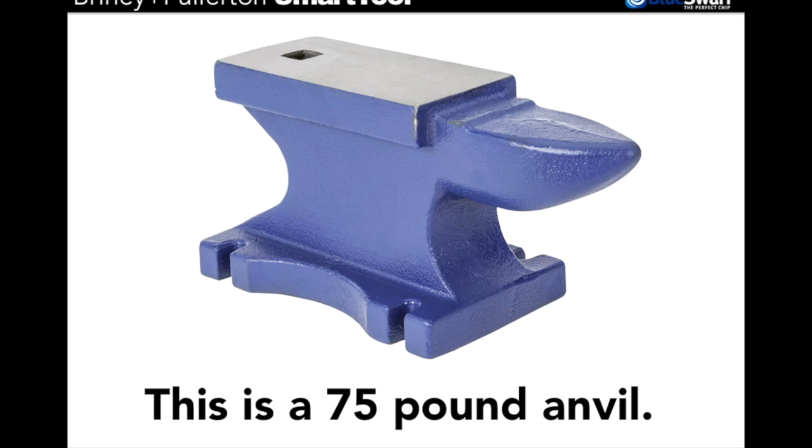This presentation is called The Physics of Milling. This is a 75-pound anvil. We attached an accelerometer to the anvil and lightly tapped it with an instrument hammer. The result is the anvil deflected, it rebounded, and then it vibrated back to rest. The takeaway from this is if a 75-pound anvil will deflect and vibrate, so will your milling tool.

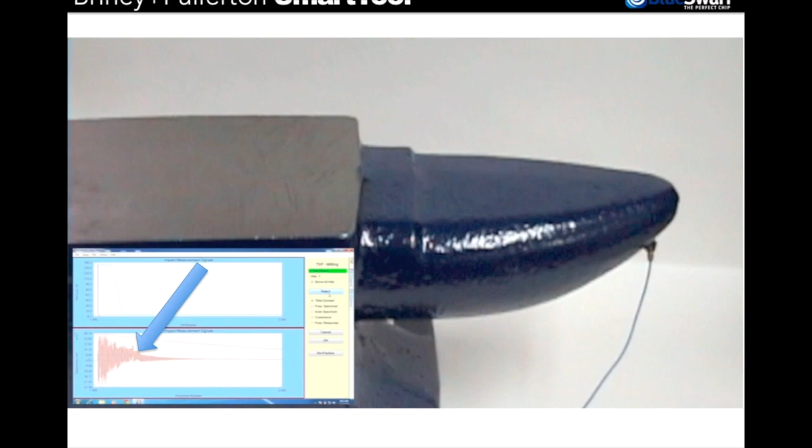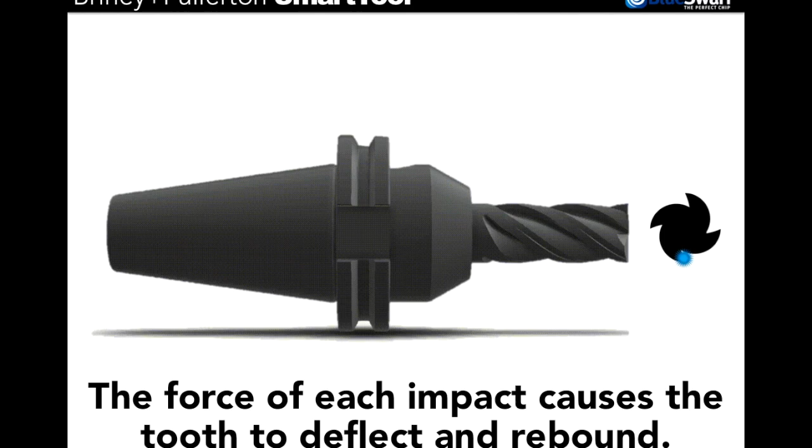The milling tool has rotating teeth. Those teeth make an impact on the workpiece with every revolution. And every impact causes the end mill, the tool assembly, to deflect and also rebound. And this is what it looks like.

The timing of the tooth impacts is very important. If we arrive too early in that back and forth cycle, we're undercutting the programmed cutting depth. We're leaving a lot of material for the next tooth to have to deal with, and we're throwing off the timing. If we arrive too late, we're overcutting the program depth. That tooth is going to fail sooner than the rest because we're exceeding its chip load limit, and we may be scrapping the part by overcutting the program.

Finally, if each tooth is cutting equally, arriving at the same timing and depth, the surface finish is going to be good, the part accuracy is going to be good, and the tool life is maximized.

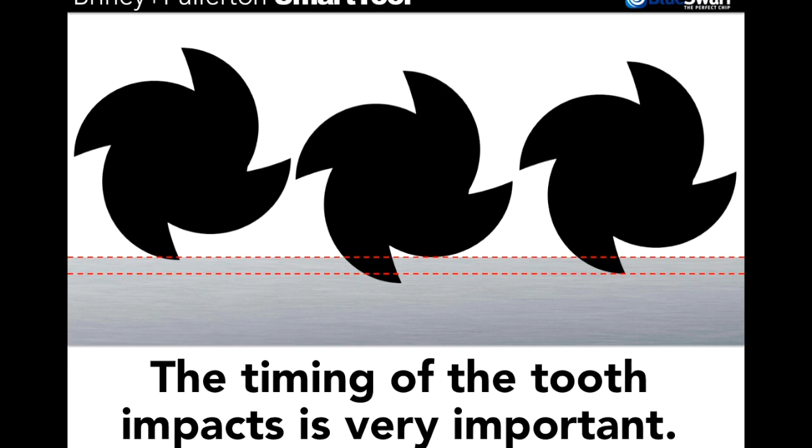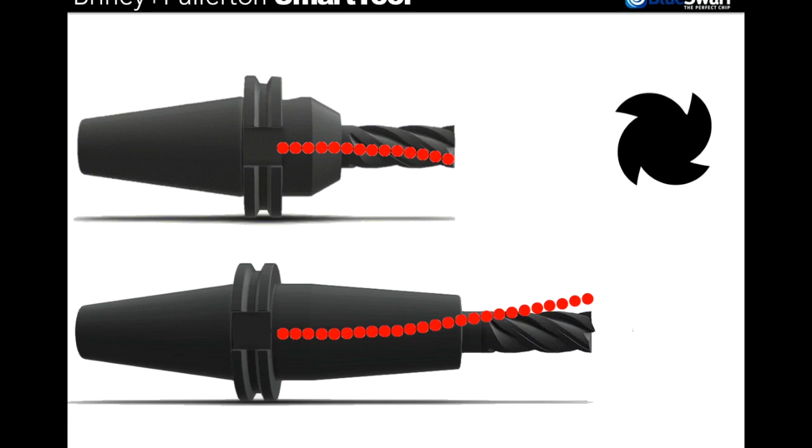This is how it works with the milling tool. So I've got an end mill and a short, stiff tool holder. The deflection is light, and we can set the timing to get the tooth impacts correctly timed. But we put the same end mill in a more flexible tool holder. Deflection is greater, and we have to slow the speed down in order to get the timing right.

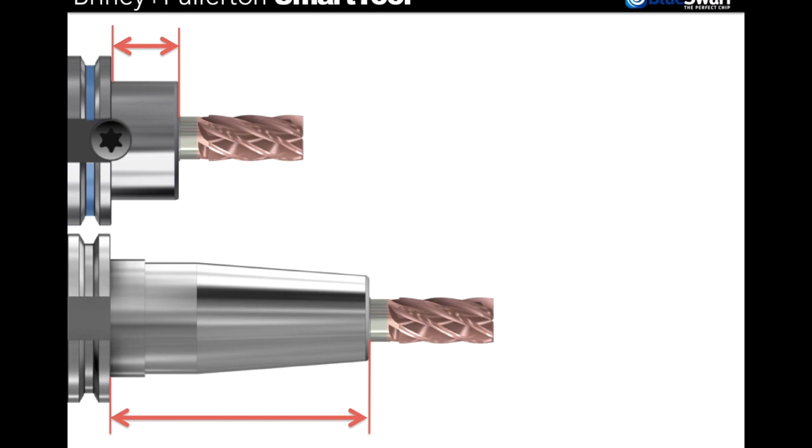So what makes the tool holder more flexible? Well, it could be length. Some tool holders have to be longer because they have to make room for a collet or some type of mechanism like a hydraulic cylinder or other type of mechanism. It could also be wall thickness. So if a tool holder is using contraction, shrinking, and expanding to hold the tool, the wall is going to have to be thinner to accommodate that, whether through heat or through pressure.

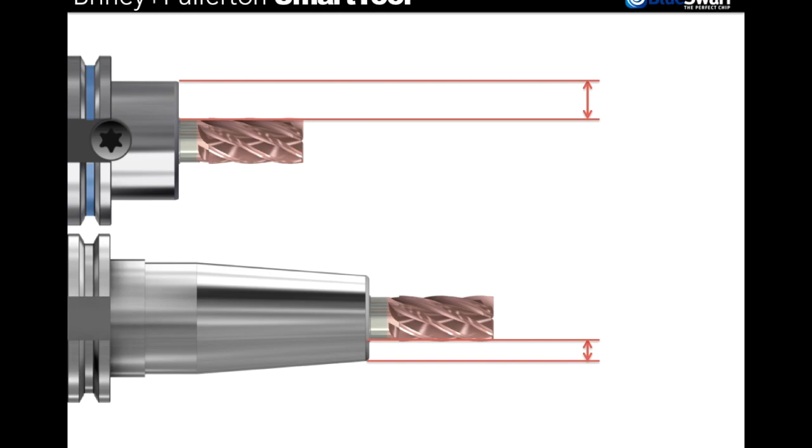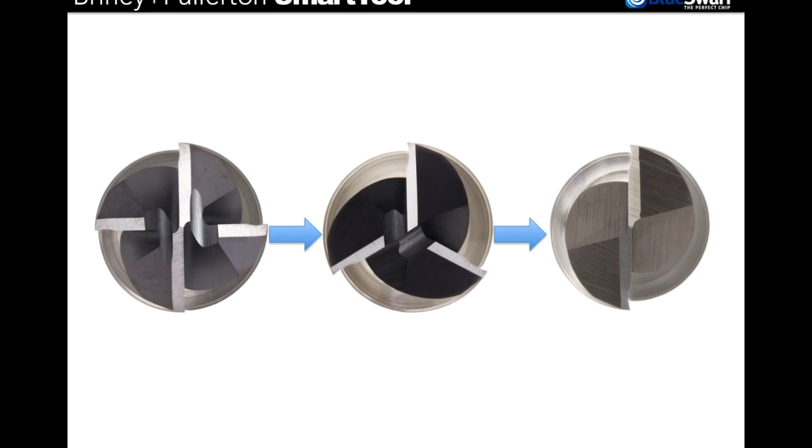So this is the response to a low frequency. We can either slow the speed down to get the timing of the teeth impacts right. We can lower the width of cut or lower the depth of cut, reducing the force on the tool and therefore reducing the amount of deflection. And finally, we can reduce the number of teeth to get the timing right. But each of these solutions reduces the metal removal rate. So low frequency equals lower productivity.

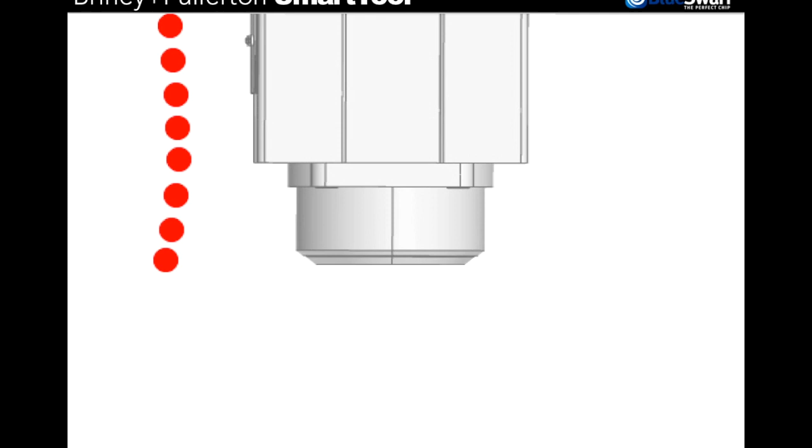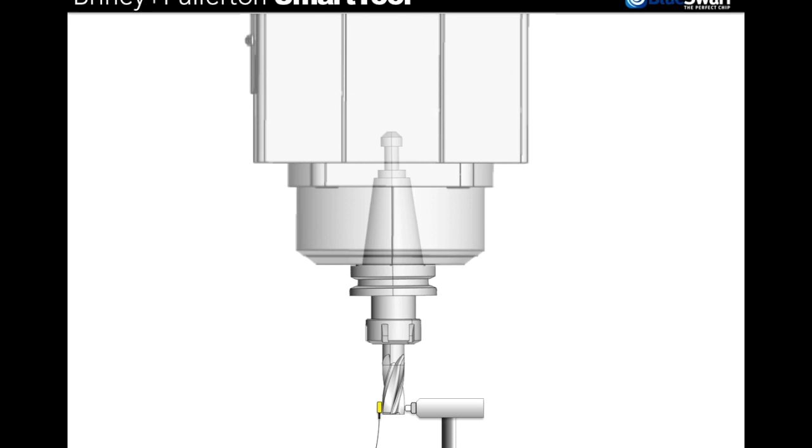Now here's the challenge. The spindle on the machine tool vibrates at one frequency. The tool holder vibrates at another frequency, and then finally we add the end mill, and that vibrates at a third frequency. So the only way to determine what the actual tool point frequency is is through a tap test. An accelerometer is placed on one side of the cutter. It's lightly tapped with an instrument hammer. We read the force that's applied and the tool's response to that force. So if you don't measure the tool point frequency, you can only guess at what the proper speed is going to be.

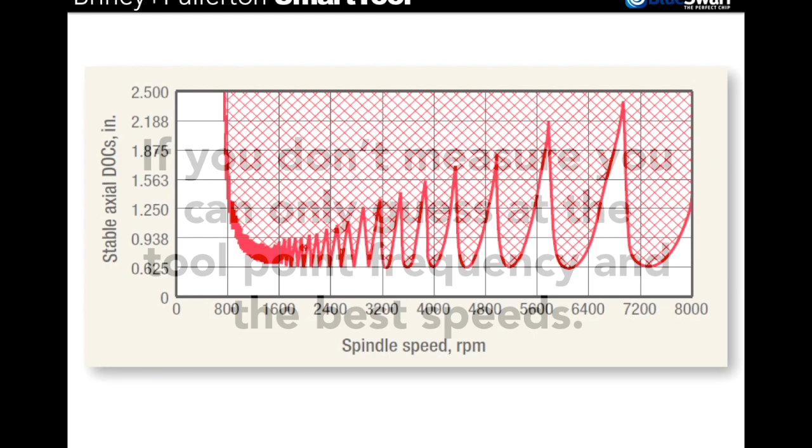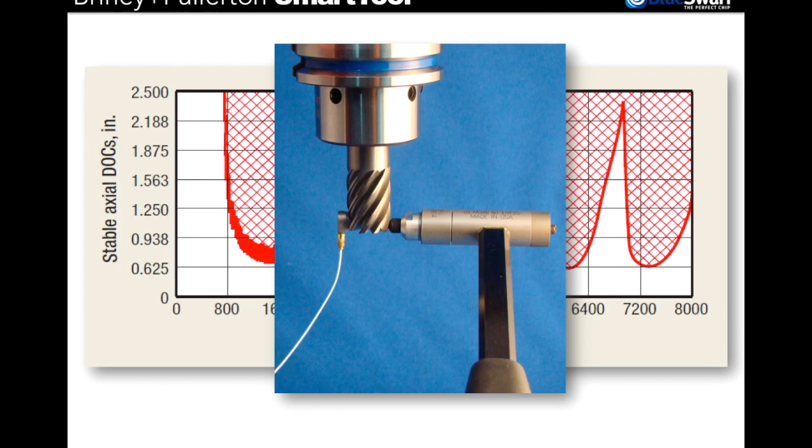So this is what we call the stability lobe diagram. It's only able to be produced through a tap test. Every different tool holder, machine, and material combination produces a different type of stability lobe diagram. A lot of companies use our stability lobe diagrams to promote their product, whether it's a machine tool or tooling.

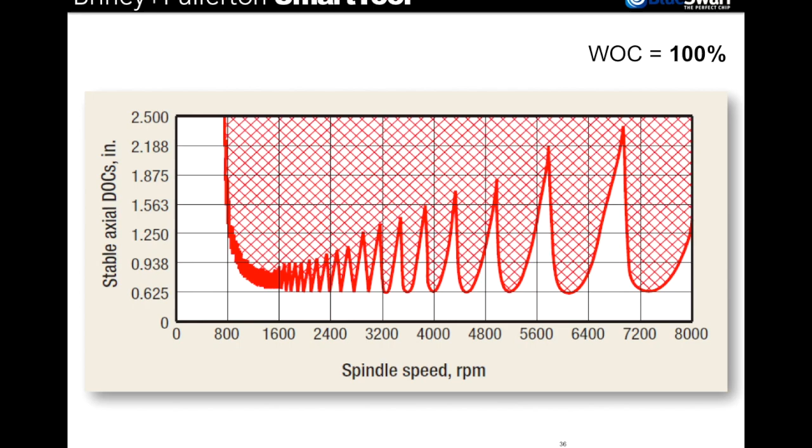The lower axis of the stability lobe diagram is spindle speed. The left axis is depth of cut. The white areas are stable combinations of speed and depth of cut. The red areas are unstable, where chatter is going to occur. On the far left, or the low speed, you see an area we call the process damped region. This means that the vibration of one tooth is dissipated before the next tooth comes through. So you can cut as deep as you want at these process damped speeds, but they're usually very slow.

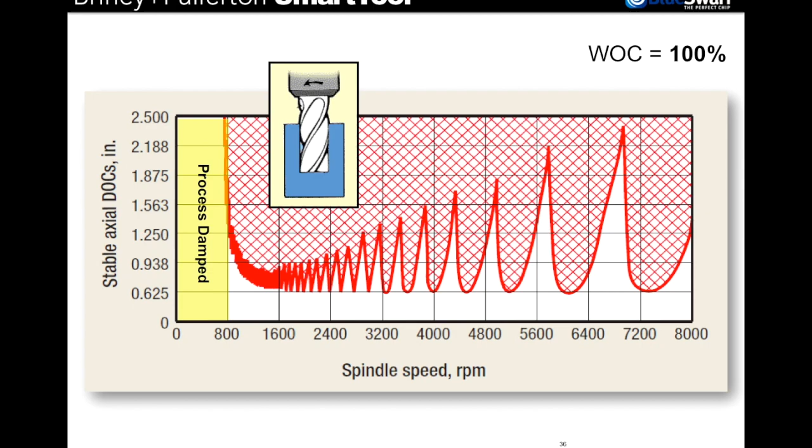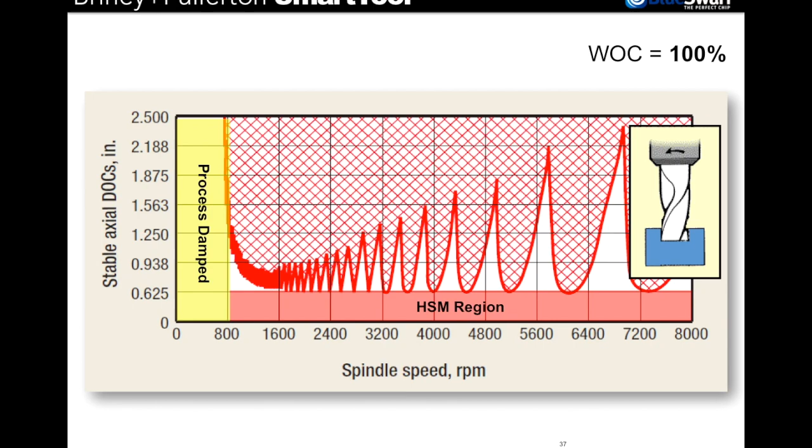At a low depth of cut, there's a region called the high-speed machining region. And the depth of cut is shallow enough that it doesn't deflect the tool enough to put it into one of these vibration patterns. And so you can cut as fast as you want. Now, if we were doing trochoidal milling, which is low width of cut or engagement, high depth of cut, we would just flip the depth of cut and width of cut around. So now the left axis is width of cut, and again we have the same trochoidal milling region instead of the high-speed machining region, which is low width of cut. I can run as fast as I want.

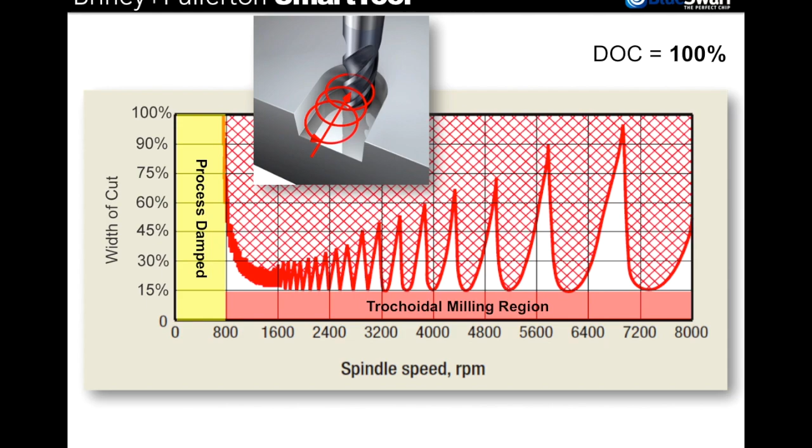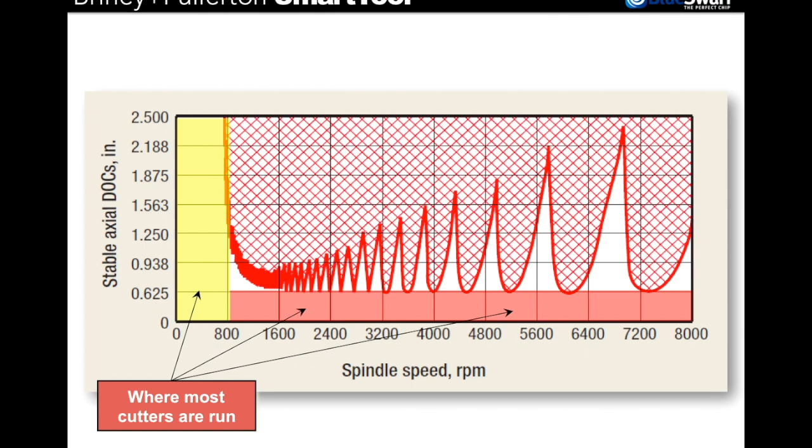And this is where most cutters run, in the process damped or the high-speed machining region. Because if you run into chatter, you end up lowering the speed or lowering the depth of cut until it goes away. But if you knew where the deepest, most robust speed was, where this lobe was located, you could have productivity or metal removal rate that's 10 times what you could get at the fastest high-speed machining speed or the deepest process damped depth of cut.

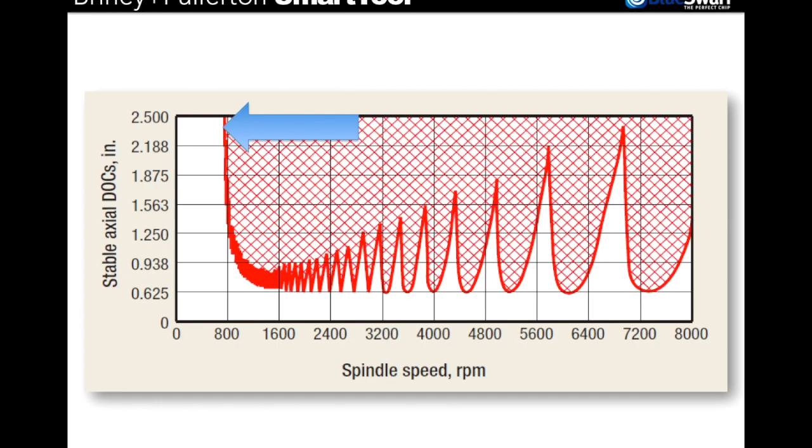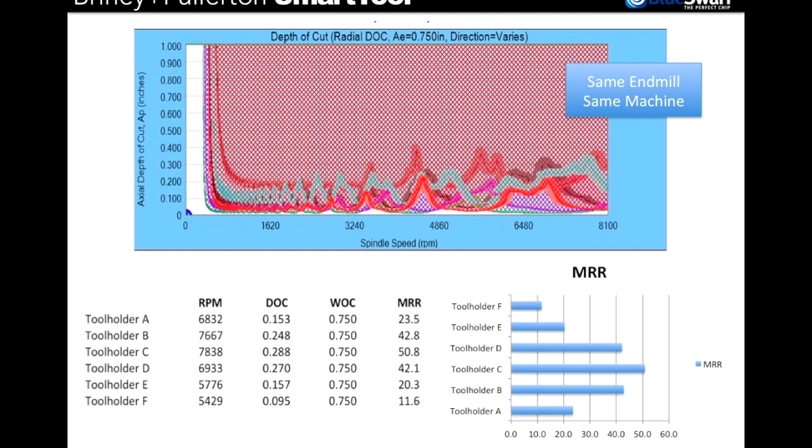So this is an example where we took the same cutter, same end mill, same machine tool, and tested it in 6 different premium tool holder systems. The difference between the best and the worst was 5 times. What that means is your end mill could either perform 5 times better or 5 times worse based solely on the tool holder you chose.

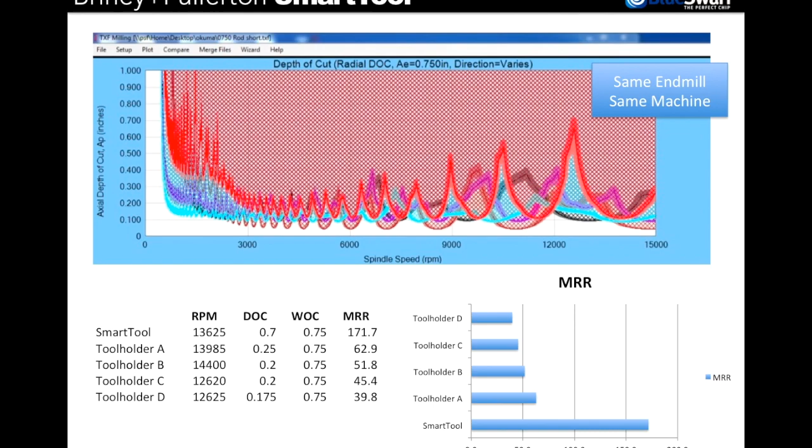Later, we tested the 4 best performing tool holders against the first version of the SmartTool, and you can see the dramatic difference. We were almost 3 times higher metal removal rate than those other tool holders. And that's where we began with the SmartTool. So with the SmartTool, we have a shorter projection, which results in a much higher frequency.

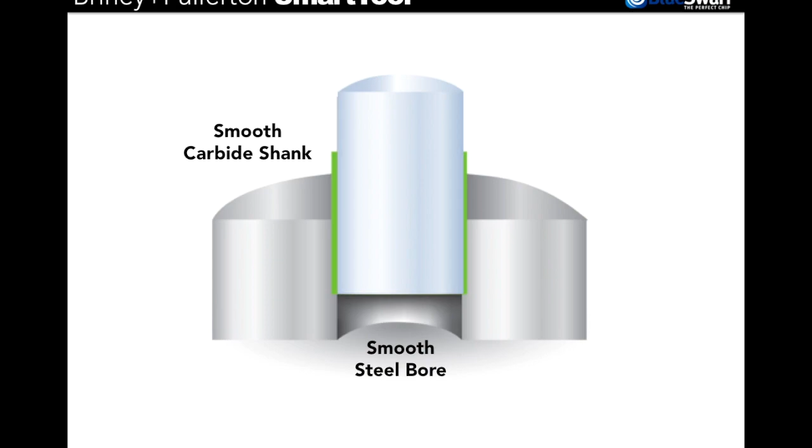Now here's where the problem begins with other tool holder systems. They almost all use just friction to grip the tool. So you have a smooth carbide shank being held in the smooth steel bore of the collet or the tool holder. But carbide is 7 times harder than steel. So there is no way that the tool holder itself is really going to be grabbing into the material of the end mill. It's not going to be deforming it or gripping it like you would see in a lathe chuck on a workpiece.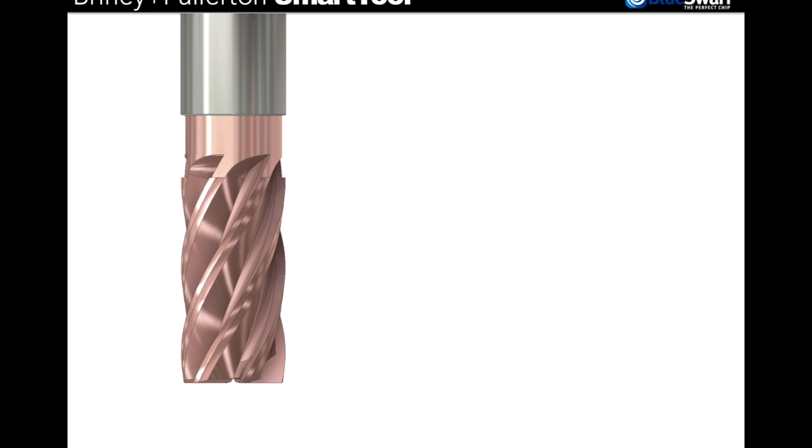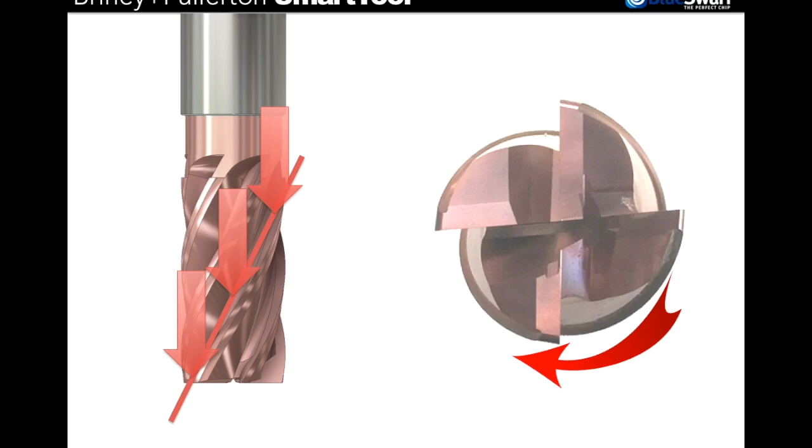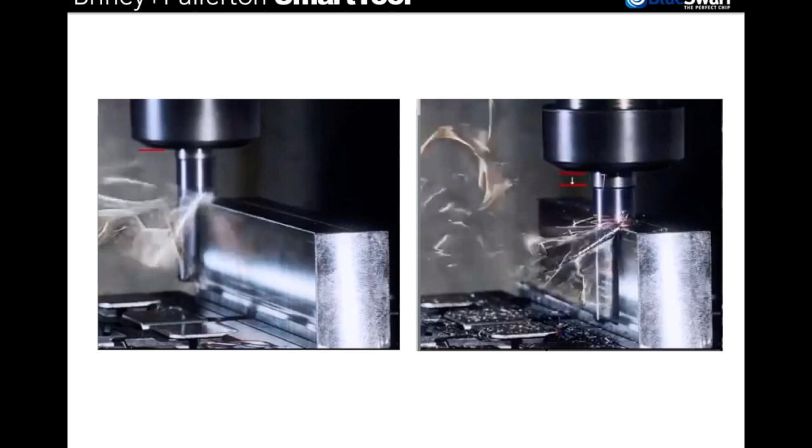With the spiral flutes of the milling cutter, you have tremendous downward force trying to pull the end mill out of the tool holder. In addition, you've got the forces pressing against each tooth, wanting it to twist inside the tool holder. The result of that is you often see tools pulling out or turning inside the tool holder. It doesn't take much to cause a problem.

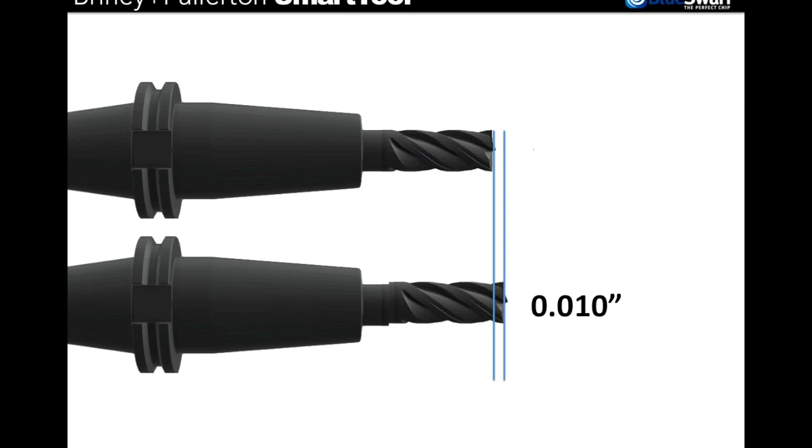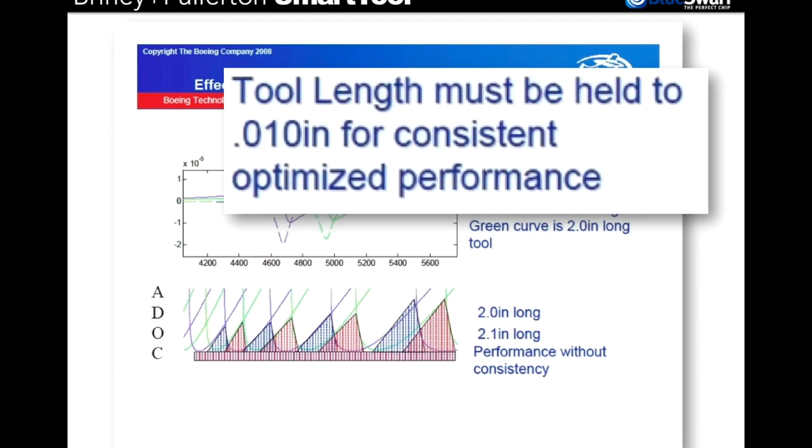In this case, a 10 thousandths difference in stick out, according to Boeing, will change the frequency of that tool. So you need to control the stick out within 10 thousandths. And here, a variation of just 7 degrees, a clocking of 7 degrees of the teeth of the end mill inside the tool holder, tripled the imbalance of the tool assembly.

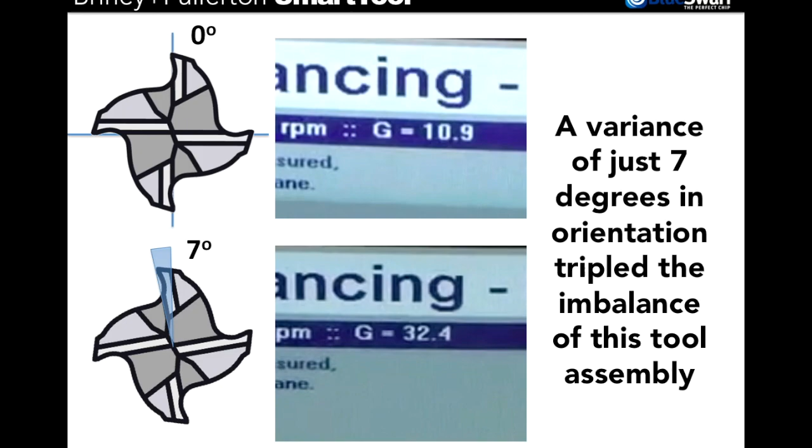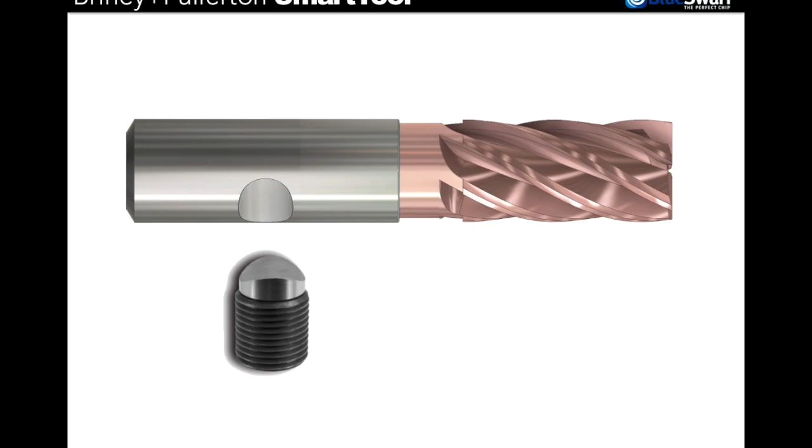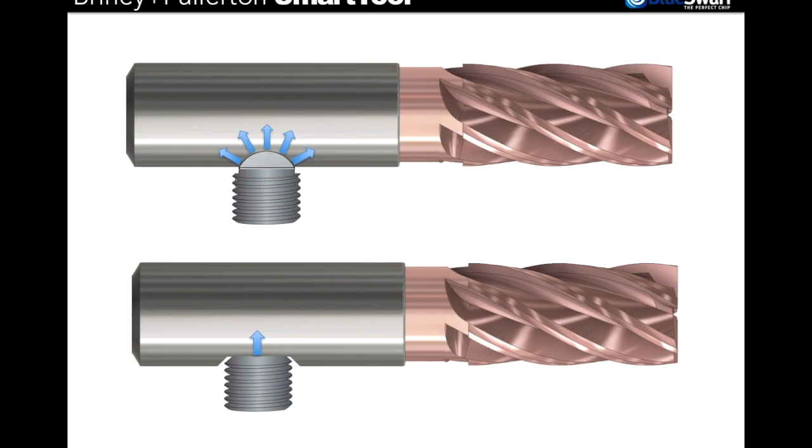Think of it this way: if you were trying to drive a gear with a motor shaft, you wouldn't just press fit it on and hope that friction would do the job. You would use a keyway and possibly a screw holding it in addition to the keyway on a flat. And that's what we did with the SmartTool. We have a radius keyway and a screw to hold it in place. The radius of the radius keyway creates forces in multiple directions rather than just a single plane on a regular screw flat. This also allows the tool to be held very accurately and repeatable.

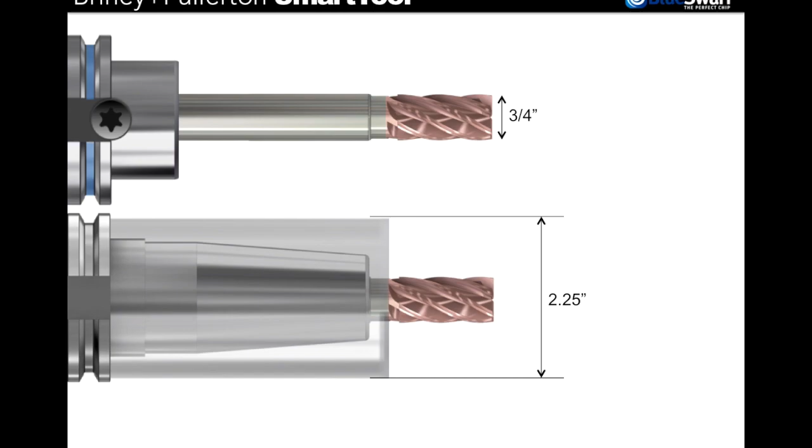Carbide is 7 times harder than steel. It's also 3 times more rigid than steel. So in this case, to match the rigidity of just the straight shank 3/4 inch extended end mill, your tool holder would have to be 2 1/4 inch in diameter. So if you overlay a typical shrink fit holder, you can see they're not coming close to that amount of rigidity. That same thing applies to the steel body of indexable end mills. In most cases, a carbide end mill will outperform the indexable end mill by a large amount, large enough to overcome the price difference of the inserts versus the replacement end mill.

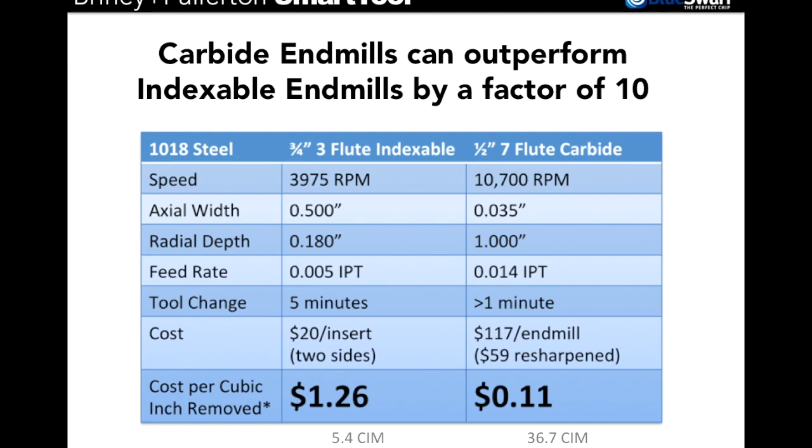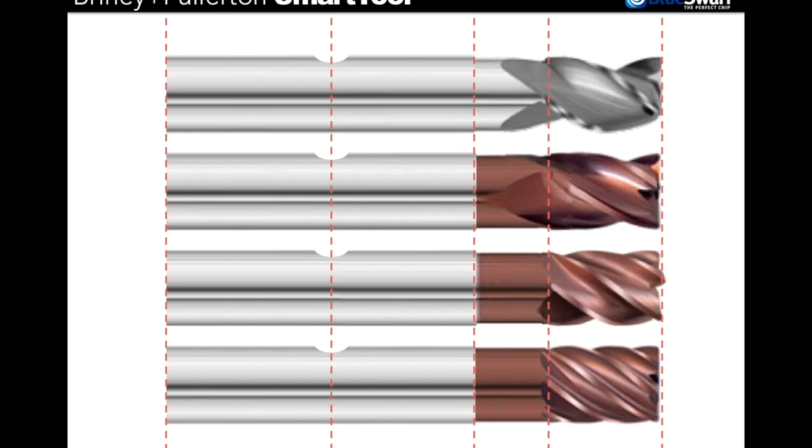We have a very standard product line of short, regular, and long length end mills. You can see that the keyways are located in the same place. The projection is the same. The flute lengths are the same across all flute types, the 3 flute, 4 flute, 5 flute, 7 flute, and 9 flute. Now we don't have extra long tools, and that's for a reason, because most milling is done on plate stock that is 2 inches thick or less. So those are the tools that we're trying to have in our first product line.

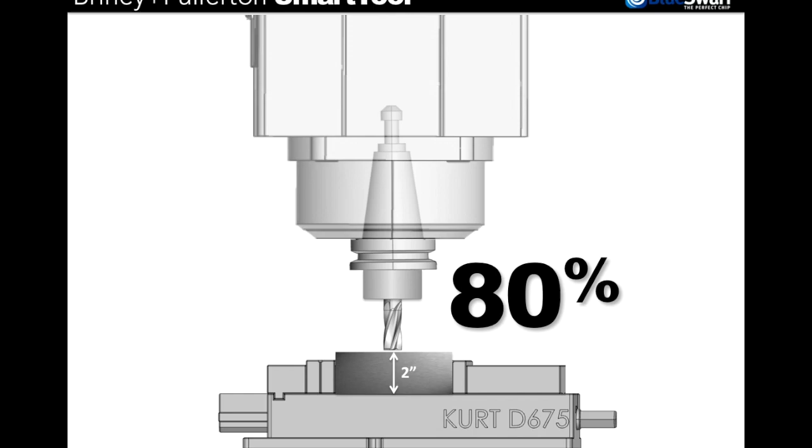But if we don't have a tool that fits the standard in our standard product line, we have an online system that allows you to design a complete full special end mill in the SmartTool Holder, and you can get the price and delivery from Fullerton, but you can also get a dashboard or a stability lobe diagram to show you how that tool is going to work before you buy it, before it's even made. Once you learn how to manipulate the stability lobe diagram, you're going to be able to design tools that are going to perform very well for your customers.

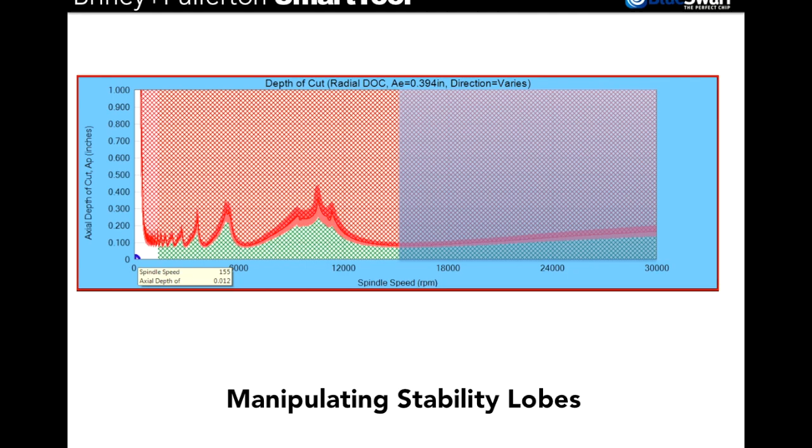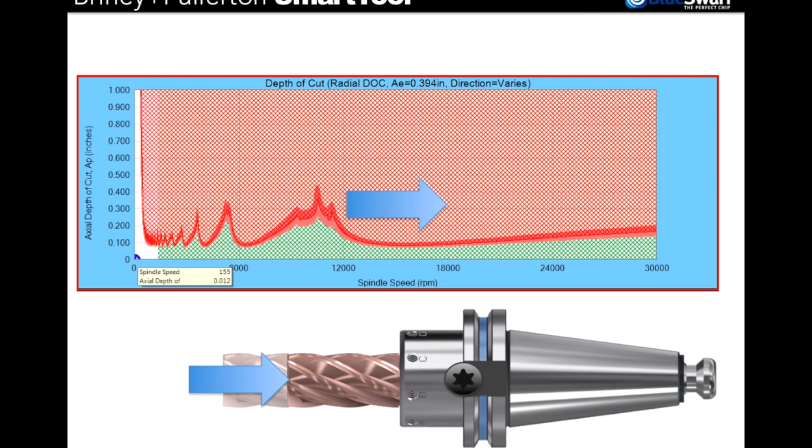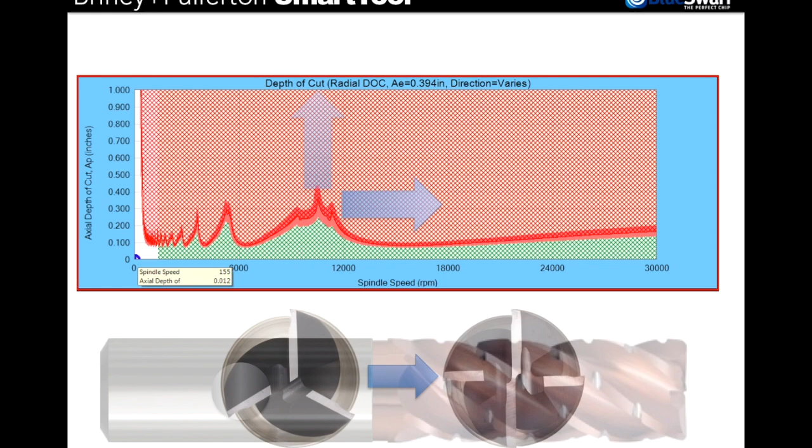For example, in this case, we've extended the capacity of the machine out to 30,000 RPM, even though it's only a 15,000 RPM machine. But this is so we can see where the lobes are going to be located at those higher speeds. The reason for that is we can manipulate or move the dominant lobe, in this case, move it to the left or to a slower speed to fit within the capacity of the machine by lengthening the tool. If we wanted to move it to a faster speed, we can do that by shortening the tool. And also, we can shift the lobes to the right or to a higher speed by increasing the flute count. And finally, if you needed to increase the depth of cut capacity or the amplitude of that dominant lobe, you can add chip breakers to the end mill.